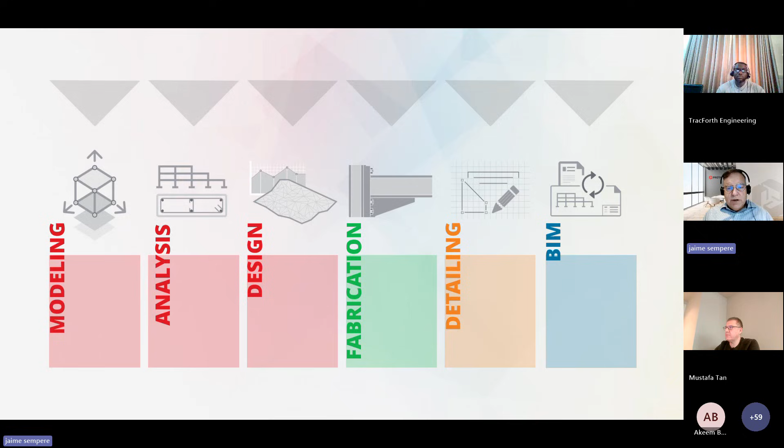Why do we consider ourselves different? We feel that by integrating modeling, analysis, design, detailing, fabrication, and the BIM process seamlessly, it allows you to integrate the whole process in one delivery, one solution. This way it allows users to rapidly deliver a project, which is what we need to do at the end of the day.

ProtaStructure Suite consists of 4 modules, all within ProtaStructure Suite. So you're just installing one package and it's all in there. We have ProtaStructure, the core system for modeling, analysis, and design of your structure.

It's complemented with other tools like ProtaDetails, a complete CAD system for automated detailing drawings, focused on concrete detailing, including a library of unique designs. Then we have ProtaSteel, which complements the steel design by automating all the steelwork connection design and providing comprehensive steel detailing and automated connections.

For more than 40 years we've been growing, and so far we're already in over 10 languages. In Africa you have obviously English, but also French speakers and some Portuguese, and we have the solutions for you as well. We have many design codes, including the most used and sought after in this market.

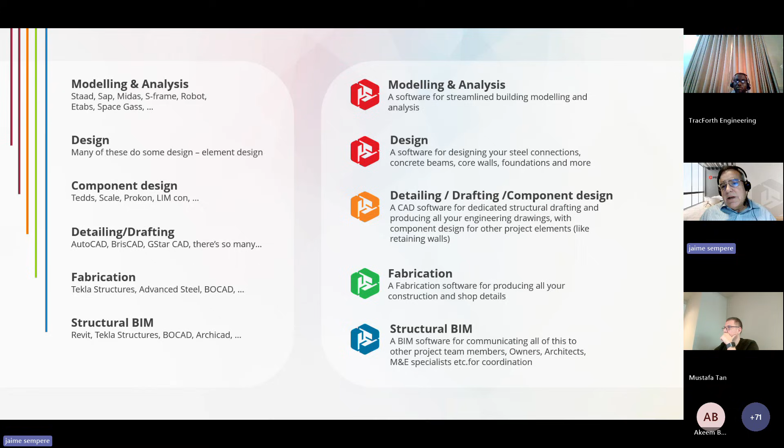That's why we pride ourselves in creating a program that covers all of the different parameters: modeling, analysis, and design with ProtaStructure; detailing, drafting, and component design with ProtaDetails; fabrication of steel features with ProtaSteel; and the sharing of data with ProtaBIM. Everything is under one software, one umbrella. You're not going from one software to another.

ProtaStructure Suite has always been developed with BIM in mind, and here on the slide you can see the entire BIM workflow that our software solution provides. Remember, all of these are offered in a single economical suite called ProtaStructure Enterprise.

As I mentioned earlier, ProtaStructure was used in modeling and designing the biggest passenger terminal airport building, located in Istanbul, covering over 1.5 million square meters. General Manager Mr. Imut made a statement from Prota Engineering attributing the added success of ProtaStructure's ability to perform project variations quickly, economically, and accurately.

We can also do projects like the largest university campus in Istanbul. This was also delivered with ProtaStructure — 50 buildings in a campus project covering over 1 million square feet.

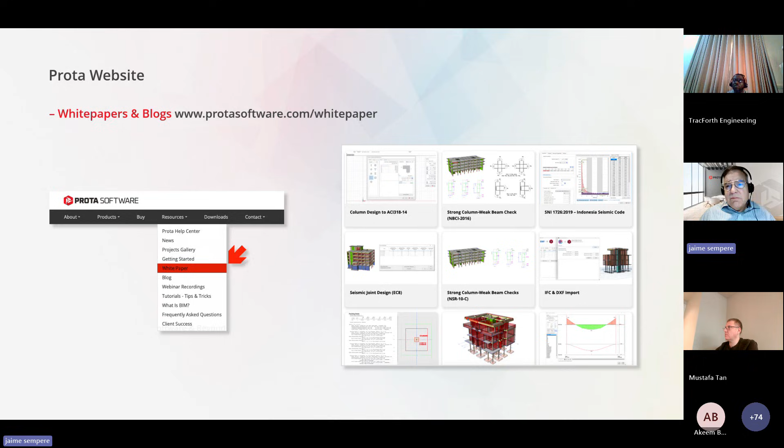We have what we offer to clients that become customers. Our licensed customers have access to our help center platform for one entire year to assist you in onboarding and all assistance that you need when you start with a new software, in addition to a white paper and blogs we offer for additional technical support, and of course a great platform for you to view videos and even entire training data on our software.

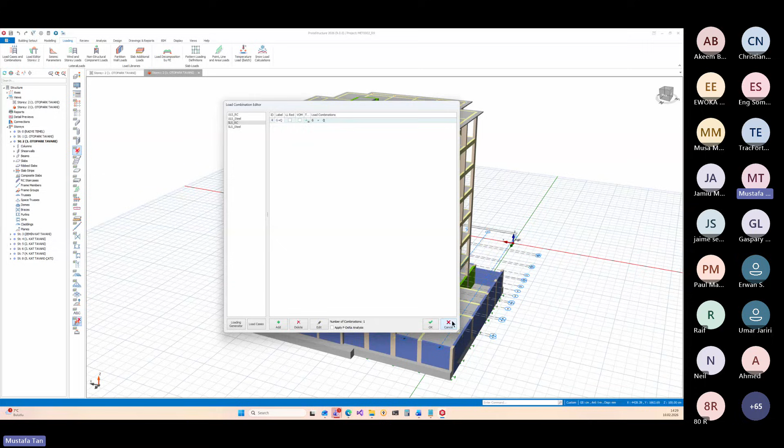So far so good, these are the combinations. But of course in the building setup you also have materials. All the materials here are brought by the templates, and they are specific to the code that you have selected.

Also, for Eurocodes you can specify the time-dependent properties of the material. We will use this in the long-term deflection check according to Eurocodes. You define the creep and shrinkage strain diagrams here, and in fact they are automatically calculated using the CEB-FIP Model Code 90 or Eurocode.

We have a huge list of settings, and we've collected them in a central user interface. So you can search, for example, rebar, and get all the rebar-related settings, or you can type in column and get all the column-related settings.

Mostly you will spend time in the design settings, steel settings, or column, shear wall and beam settings. All the design settings and detailing settings are residing here. In fact, one important setting here is the units.

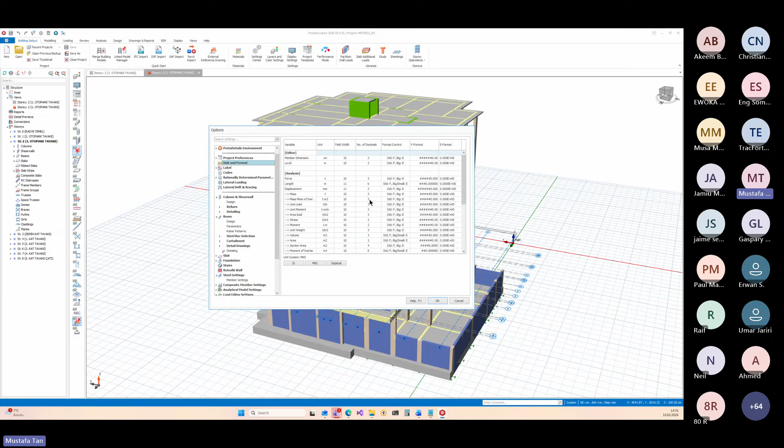These units are set by the template, but you can change them if you like. You can change the reporting and the UI units separately. This is not something you'll play with very much, but you have the flexibility to use Imperial, SI, or MKS units in the software. Anyway, so this is the settings.

Maybe we can continue with the modeling. Let me open up a project for you where we have concrete and steel models together, members together. As we say, ProtaStructure is a multi-material software, meaning you can model steel and concrete members together. So beams and columns here are modeled, and together with them you have the steel members.

All you have to do is select the appropriate member from here and model it in the structure. But one important thing in steel structures is that we have to be careful about the production during modeling, since concrete is a monolithic construction so we don't have to be as careful. Of course architectural eccentricities are important because when we do the detailing in concrete, the eccentricities should be accurate so that all the bar bendings and dimensions are accurate. That's also important, but in steel we have to be more careful because eccentricities should be compatible with the construction.

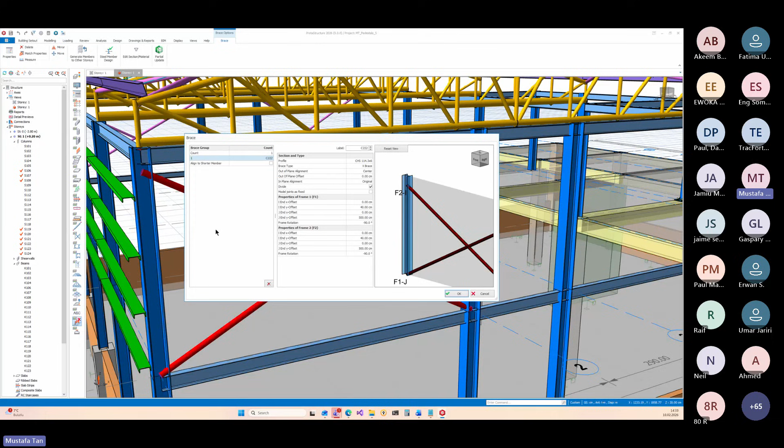In steel modeling we always separate the analysis model from the physical model, because in engineering we want simplicity in analytical modeling and some flexibility in the physical model. While we insert the steel connections, we always want to shift the members by 10 or 20 centimeters, and we don't want the analytical model necessarily affected by it.

So we can define all sorts of eccentricities here. Also, we have a purlin, which is again a macro member - all you have to do is select the trusses and you will have the purlins inserted. And together with the purlins, we have the sag rods.

These sag rods are not only for the visual, but they affect the design of the purlin as well, because they restrain the purlin against lateral torsional buckling, and they are also included in the analysis. You can, of course, exclude them from the model and from the analysis as well.

And for the trusses again, trusses are parametric in ProtaStructure. We have a library that you can use. Of course, what we do is always try to match the centroidal lines of the truss members in order to make the connection perfect during production.

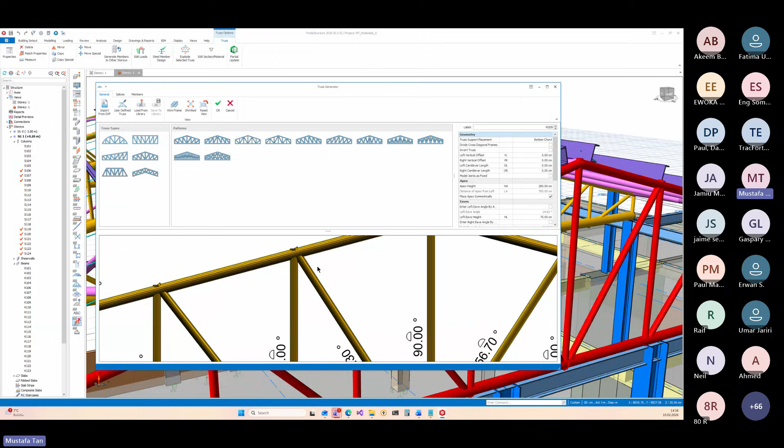We also have a concept called user-defined truss. If you have a custom truss beyond the templates, or from your DXF file, you can import that into ProtaStructure and use your own truss. These trusses are fully flexible - you can select the top chord and bottom chord sections, all the diagonal sections. They are more controllable, and you can customize them the way you like. So this is for the steel modeling.

Actually, it's a very flexible way of doing the model in ProtaStructure. So you can mix and match the structural members together. The recent addition to ProtaStructure was, in fact, the pedestals and the sub-basement walls.

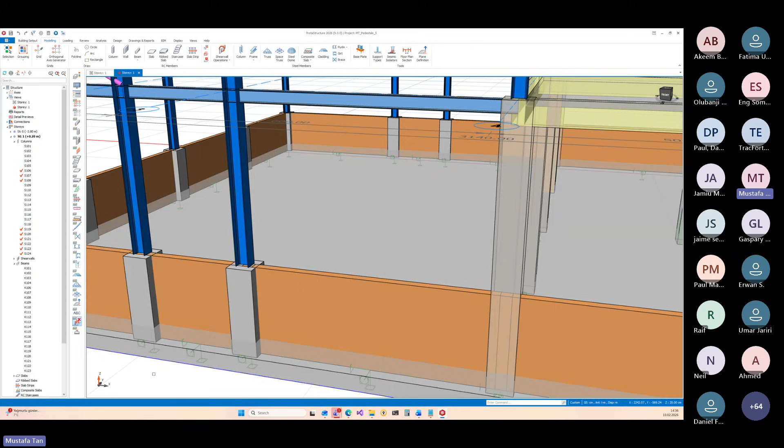Maybe I will explain it more specifically. In steel structures, let's see the concrete. For concrete, we can bury the concrete column within the foundation depth, because we can do so. But for the steel structure, for the steel column, we cannot bury the steel column within the foundation because soil will deteriorate the steel column and affect it negatively. So all we have to do is insert a pedestal under the steel column so that the pedestal itself is in the foundation and the steel column is sitting on top of it.

So this is what we brought. And sub-basement walls are also a part of foundation. In previous versions, we had to model them with ordinary shear walls, and sometimes we had to create a separate story for the sub-basement walls. But now they are directly modeled in the foundation level. So this is the foundation level from the plan view, and we have a dedicated sub-basement wall member. You can use this member to model the sub-basement walls, and they are included in the analysis, if you like.

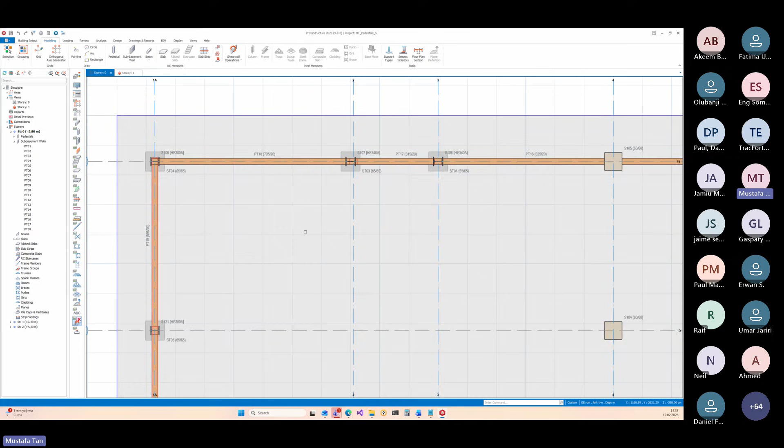You can apply loads on sub-basement walls. They can support other members, they can support lateral load, they can support the infill walls on top of them. Let's see if you have an infill wall - for example, you can go to the foundation level, edit loads, and insert a wall load on top of the sub-basement walls. So these are very handy members that close the gap at the transition from foundation to superstructure. We have introduced these members. Anyway, so far so good.

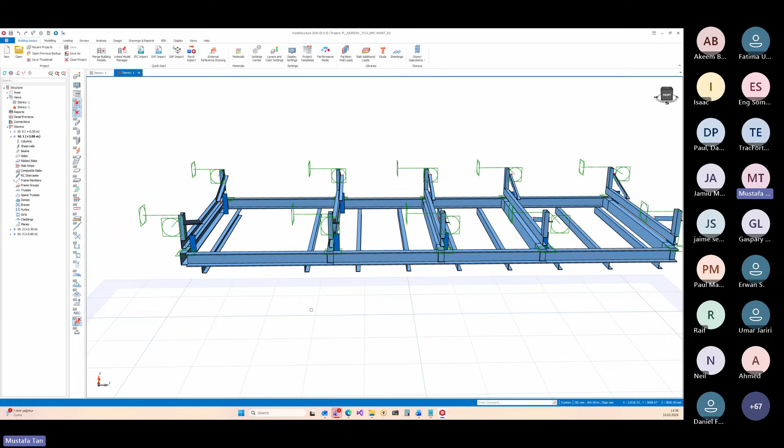Let's continue with another interesting project, let's see, it's called PL. Yes. And this is a very interesting structure. In fact, as you see, this is not a building - this is an overhang structure. It looks ugly, but our users are able to design structures like this. You can use ProtaStructure as a general purpose analysis package. There's nothing stopping you because you don't have to have any columns or shear walls or beams in the system. Well, you can design a structure like this using the frame members.

Let's see, for example, this member here - we have supports. You can assign supports to any members in ProtaStructure. So by assigning supports to these members, our user modeled and designed an overhang steel construction structure like this. And using the loading editor, you can load the structure any way you like, or you can select a single member and edit load - you can assign loads on the member. It can be a trapezoidal load, a partial load, or a point load.

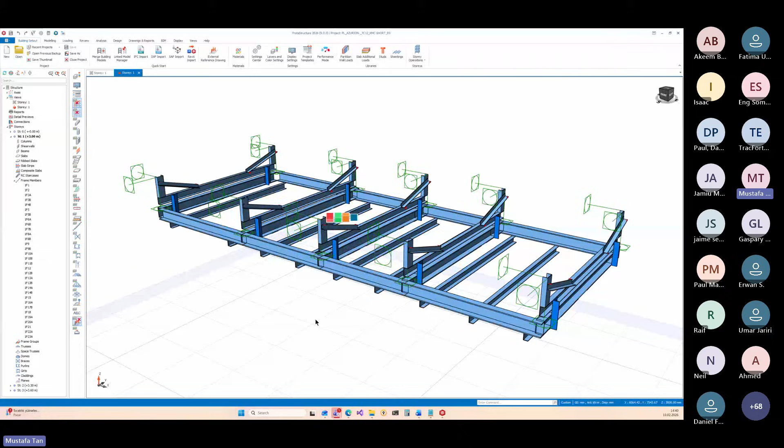It's very flexible. So now with the additions that we did with the program, in fact maybe it's correct to say the sky is the limit in the software, because as you see, this is one of the structures that our users model. Our users model pedestrian bridges, all sorts of playgrounds, steel structures that are really having parametric shapes. So this is the way we are going at the moment - we are going beyond the conventional structures as well.

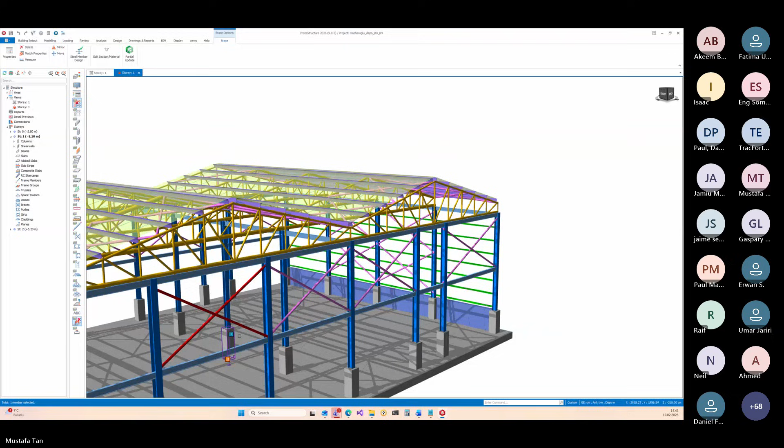And as you see, we have the brace members. The brace members are also parametric. You can define it with a brace macro here.

Another interesting thing, this building was modeled for demonstration purposes to show the castellated beam features. So now in ProtaStructure we have castellated beams. All you have to do is go to the properties, and in the castellated beam property you can select hexagonal openings, circular openings, and it will be a cellular beam, etc. You can control the parameters here. The design of the castellated beam also uses the proper checks.

Let's see, we have the analysis here. Let's go to the design of this steel member design. Okay, let's check the design and detailed reports.

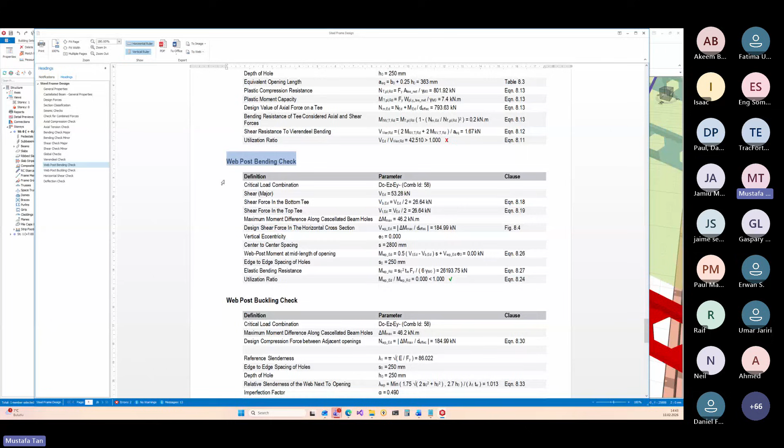The castellated beams are different than ordinary beams because you have to do a web post bending check, since between the two openings you have a small portion that's susceptible to bending and buckling. So you have to check web post buckling and web post bending, and that small portion between the openings is also susceptible to shear, so you have to check the horizontal shear as well. So in addition to the standard checks, you have these additional checks here.

Let's close this one. Let me show you another - this is again from one of our users. It's a steel building, but a larger one, a larger complex than the ones I showed you.

What is different here is - let's change the view to rendered. So this is again steel columns, steel rafters, and trusses as well. We have here the brace members with the brace macros.

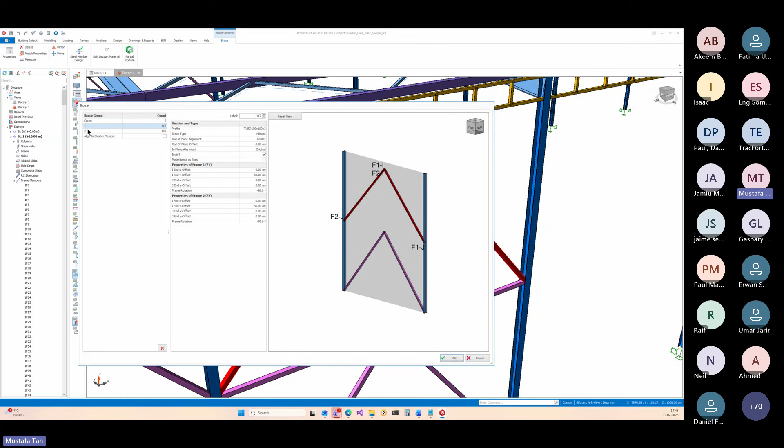But here, as you see, in between these two columns, we have two braces defined as a brace group. So when you have to model multiple braces, you can do it with the brace group functionality. And in between these two braces, our user modeled a vertical brace with a frame member. So you can mix and match macro members and normal frame members in the model - this is a normal frame member, and its frame type is vertical brace. You can do this very easily.

It's fun to do in ProtaStructure, in fact, but here's one interesting modeling approach. This is also a horizontal brace, but here you see we have a dashed line representation of the analysis model - the physical model is slightly above the analytical model.

That means this frame - let's open the linear view - is in fact connecting to the purlin, connecting to the beam and the column at the analytical model level. But when you switch to the rendered view, you will see that the physical member is slightly above the analysis model. That's because we have to coincide the physical members to do a proper connection.

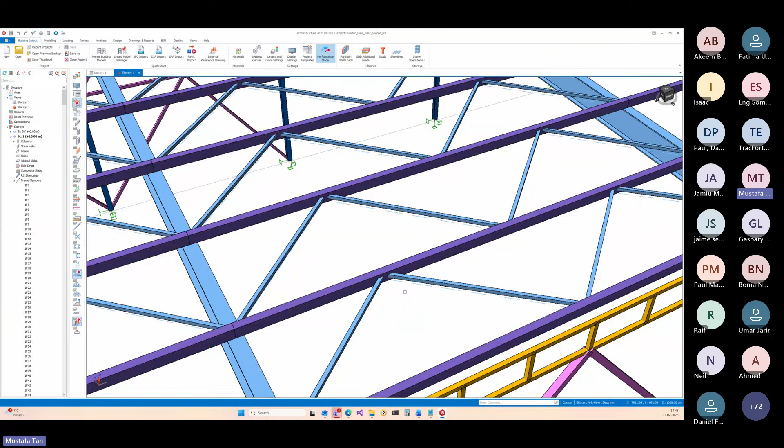And we don't want the analysis model to be a dirty model full of rigid links, full of small eccentricities, etc. Of course, in the analysis models, eccentricities are necessary when they are significant and when they affect the design. But for these kinds of cases, eccentricities are usually within the limits, and you can just simplify the analysis model.

Okay, let's check the properties of this frame, for example. And when you go to the 3D view, you will see that I have an in-plane offset of 10.5 centimeters.

Let's go to the other model. We have a very recent addition in ProtaStructure 2026, which is the stairs. In fact, we had the stairs before - in previous versions, we had the stair design functionality in ProtaDetails, where we were able to design the stairs, but with the new ProtaStructure you are able to model them inside the building. So let's check the 3D view.

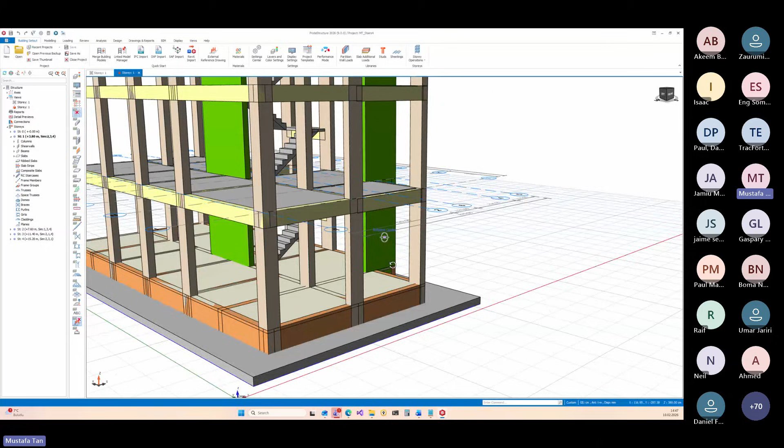As you see, first of all, in the foundation we have the sub-basement walls, sub-basement slabs. Of course, the sub-basement walls are supporting the infill around. They are not like basement walls - they are different than the basement walls. In the structure, we don't have a basement. If you have basements, you don't need the sub-basement walls.

Sub-basement walls are usually for structures that don't have basement walls, because some structures are already 1 or 2 stories below the ground, so you don't need a sub-basement member to do the transition. If your structure doesn't have a 1 or 2 story basement, if it sits directly on the ground, you have to bury the foundation by some amount, like 1 or 1.5 meters, and you have to do the transition with the sub-basement wall.

That 1.5 meter infill will be supported by the sub-basement walls. Let's hide this - hide selected. Also, inside this one, you will have the infill as well.

Sorry, yes, it's soil fill as well. On top of that soil fill, you will just lay some fabric mesh reinforcement, and that's all. Then you will have the sub-basement slab. So this sandwich here is part of the foundation.

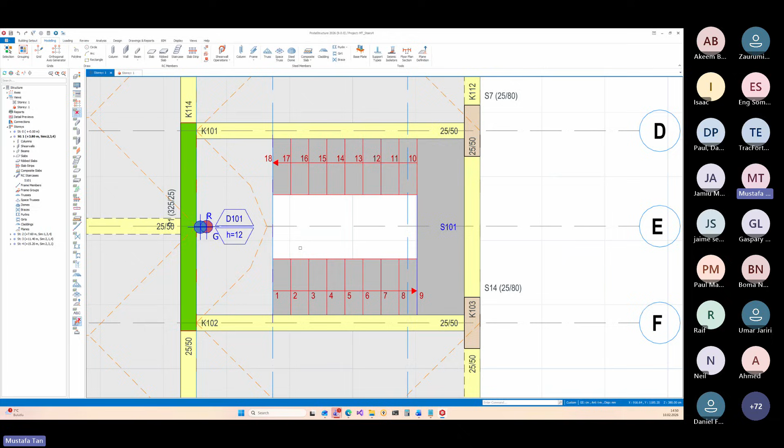Okay, let's see what we have here. We have the staircase. All you have to do is show the region - I won't do the demonstration, it's very easy. Select the staircase, insert using 2 diagonals, show the place that you want to insert the stair, and we have a dedicated stair editor here.

So you select the type. It can be straight, straight with a single landing, an L shape, or U shape, or U shape with 2 landings. We will increase the types here - of course we are currently working on spiral or helical staircase. But this is parametric. You can specify the landing width or the flight width, number of treads - all customizable, and you can even see the rebars in 3D here.

And all the detailed drawings are created using this rebar. The best part is, when you do it, it will be generated to all the similar stories. Let's check one of the stairs here - all the self weights and other loads are automatically applied.

But if you want to apply additional loads to the staircase, you can - this is like any other regular member, so it's very easy. Let me directly jump to the analysis model. The best part here is you can model the stairs with the building.

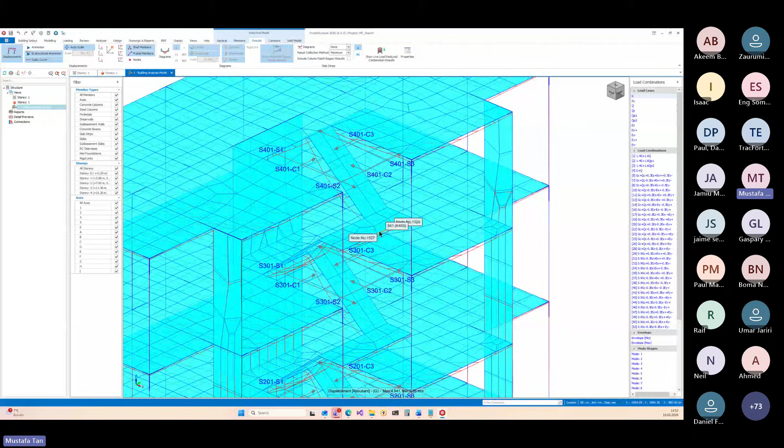This is the magic here, because first of all, you have to mesh the slab with the staircase, otherwise it will not be a nice model. We recommend you to mesh the slab with the staircase. But I must admit that modeling staircases with the building is a controversial topic - engineers are discussing whether we should include the stairs in the model or not. In fact, the stairs are the members that will maybe be damaged first in the earthquake.

So by modeling them with the building, what we do is introduce a stiffness between these 2 stories. Let's close the displacements - as you see here, these staircases will act as a brace member between two stories. They will try to limit the relative drift or lateral drift of the structure. Maybe it's best to exclude them from the building and see how the drift changes, or you can do another model and include the stairs.

So modeling stairs together with the building model may do more harm than good - you must be careful to do that. Everything integrated is not always a good thing, but this was our user request. The best part here is you can design the staircase with the finite element.

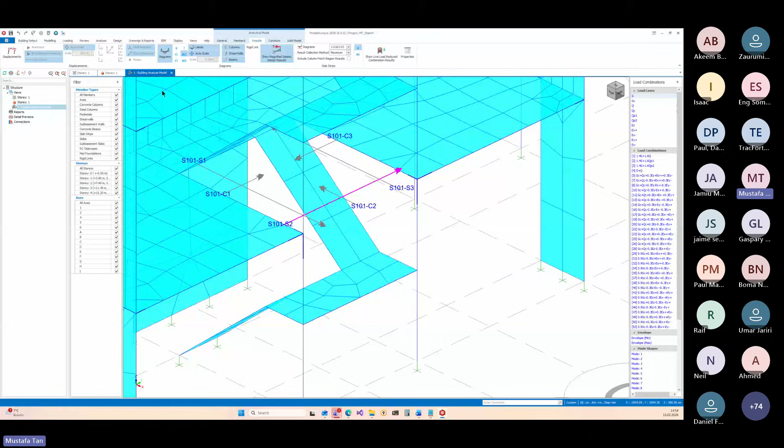So here you see we have - let's see the moment diagrams. We have the slab strips, and we collect the moment values along the slab strips. And when we go to design, let's go to the staircase design - you will see the staircases in the model.

Oops, I recently changed the model - I think I made a mistake here. Okay, let's start over again. Sorry for this one.

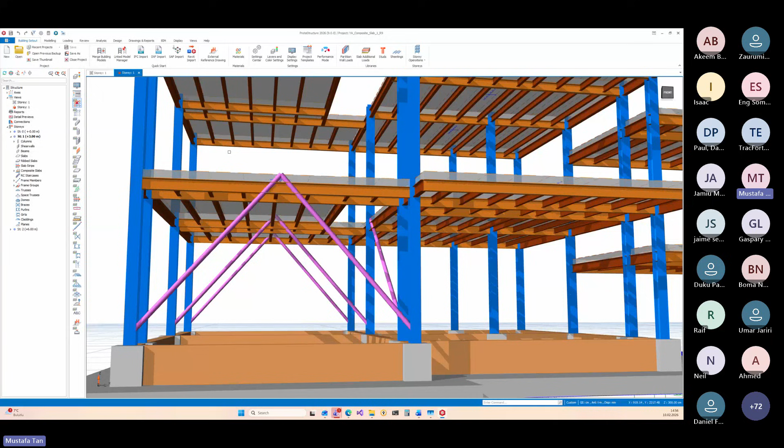And we are not done yet, because in addition to the stair functionality and steel and concrete functionality, we also have a very strong functionality we call the composite slabs. In ProtaStructure, you can model and design composite slabs as well - by composite slabs, I mean composite beams. So here in ProtaStructure, we have a frame type called secondary composite beam, primary composite beam. It's also here in frame: primary composite, secondary composite, and also you can insert a composite slab on top of these members.

And of course the composite slab has a deck direction, so you have to insert the deck. The deck direction must be perpendicular to the secondary member. So let's see the properties - we have the deck, and all the effective widths between the decks will be calculated automatically, because composite design is all about effective widths, and it's all about the composite degree of action.

So what I mean here is if you go to the setting and the composite member setting, what we usually start with is analysis: composite degree, and composite degree tolerance, because you have to assume that your members will behave at some composite degree. You cannot assume full composite action because there will always be some shear slips, there will always be some imperfections. So the interaction between the steel and the concrete will not be perfect - there will always be a partial composite behavior. So we assume at the beginning the default value for the composite degree is 50%, but of course by changing that you can change it.

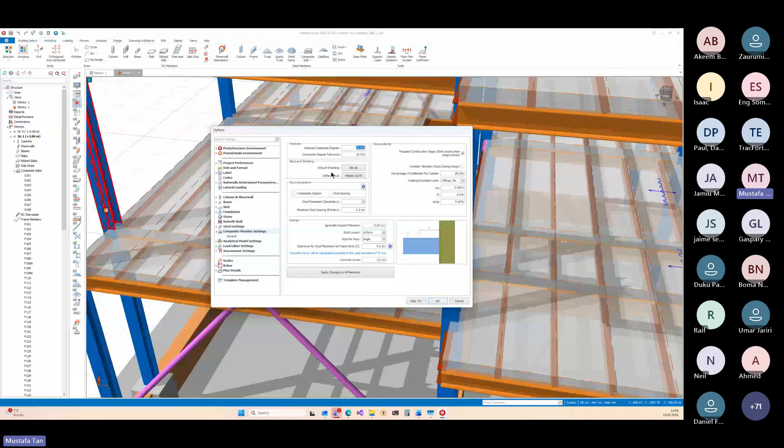When you do the analysis, we assume and calculate this effective width using a composite degree, assumed at the beginning. And at the end of the analysis, let's see the analysis model first.

And also maybe another model for the floor models. Analysis of the composite building is not straightforward because in composite structures, we have stage construction. This is different from stage construction in high rises. During construction, you install the deck but don't pour the concrete first - that's one case. The other case is you have the concrete, but it hasn't set yet. It's wet concrete, and it's nothing but a load to the system. Also during construction, you have a live load, but it's a construction live load.

Let's go to story one and go to properties. That's where we set the live load during construction - the live loads caused by the workers, etc. You enter that value, and while ProtaStructure does the analysis, it will do a floor by floor analysis.

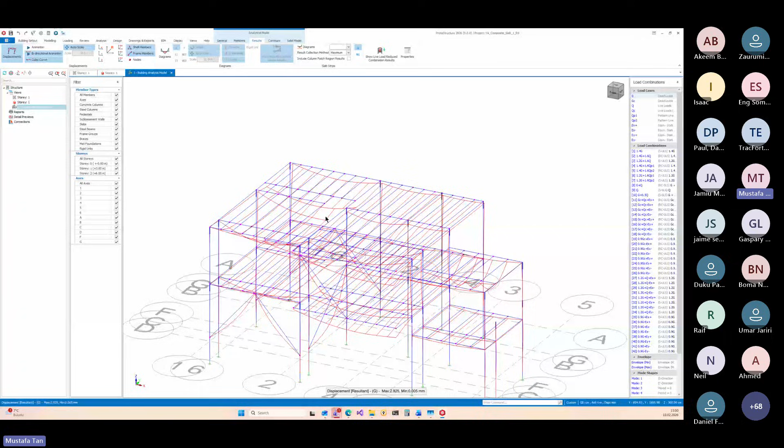After the concrete sets out, after the construction finishes, we now have solid concrete, and we don't have hinge connections anymore - we have the final loads on the member. We have the final results for the structure. So we combine these results and we get the design values.

Finally, you go to the design and the composite beams menu. For example, you have all the composite members here. Double click one of them and you will see that shear studs are calculated. So the design is also done according to the 50% composite action.

But sometimes you will have difficulty in design because it's not straightforward. You can change the stud spacing, or you can change the composite degree. If you increase the composite degree, say to 60% composite, you will have to increase the number of studs, because to satisfy more composite behavior, you need more studs.

You can decrease the composite action, make it 40%. That means you don't trust the composite action as much - you say you'll live with less composite action, so you decrease it here. But if there's a tolerance of 10% between analysis and design composite action, you have to be careful about this. It's a bit detailed, but anyway...

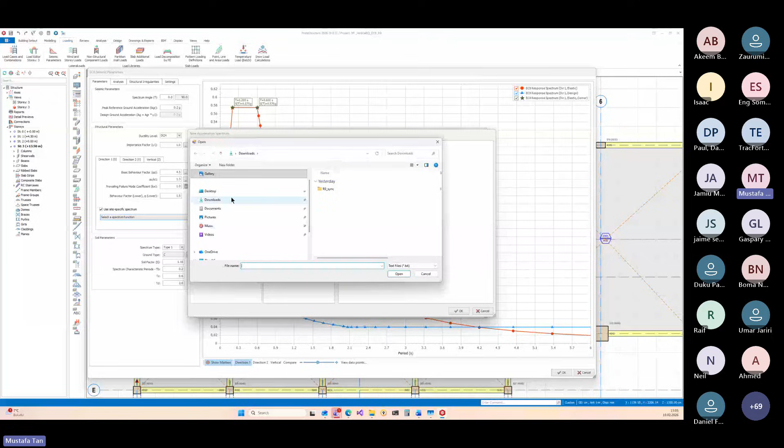Then you will import from file - if you have a spectrum in a notepad or Excel file, you can import that spectrum here, and you can use the site-specific spectrum in X and Y direction, and also in Z direction.

Let's see. Maybe before vertical earthquake, I can mention this.

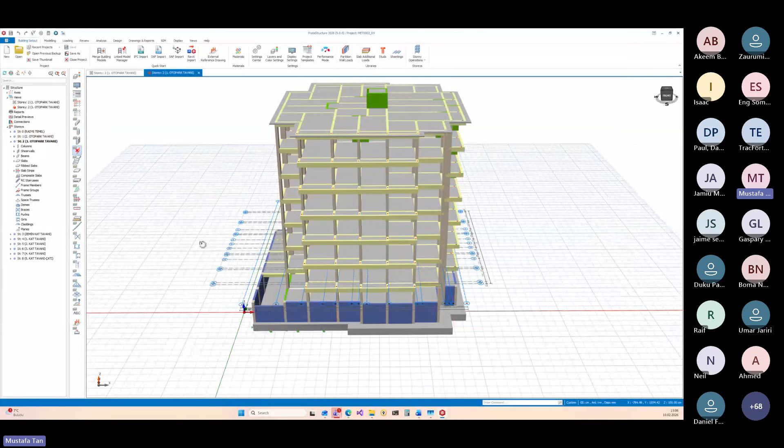This is a model from a user. It has a basement story, and a podium-like structure in the basement. It's a 7-story building, and we have an equipment story here as well.

So when you go to edit story, you can set parameters here, like whether one story is a sub-basement or a basement story, or you can select imposed load reduction, because if you have a high rise, you will want to apply imposed load reduction. Also for the earthquake, you can set the simultaneous presence for the imposed loads.

When we do the analysis, besides the seismic parameters, we have other things like model options. You can use the crack section properties—this is required by most codes. Most of the time you are not allowed to use gross section properties; you have to use certain crack section properties, and you can control these here for the members.

Like shell shear walls, mid pier shear walls, basement walls, slabs, columns, and beams. Depending on the member type, you can set different effective section modifiers for different degrees of freedom—for bending, axial, or shear, etc.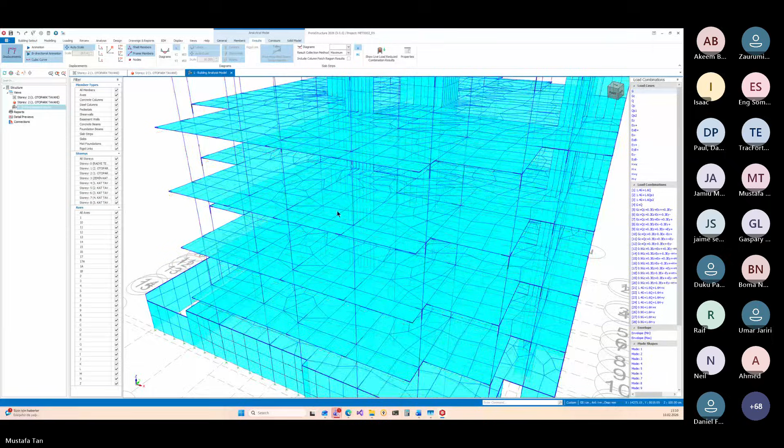Let's close the results for a brief moment. As you see, we are using quad mesh in the slabs. This is also new in ProtaStructure 2026—before, we were only using triangles, but now you are able to use quad mesh as well, and we are doing a compatible mesh. So where are my notes here?

Okay, so these are all compatible with the walls and the foundation as well. So let's check the results.

Displacements here—so what we have here are the earthquake loads. We have the EX load case, so you can check the displacement of the structure in each earthquake load case.

But here we have an interesting case, because since we have a basement, ProtaStructure performed a two-stage analysis. And for the basements, you have the basement load case, and we have also some soil effects here.

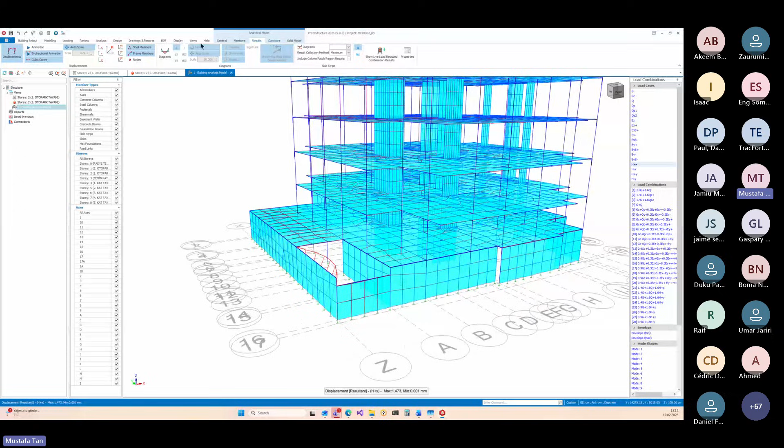Our user applied a soil load on this shear wall. You can see the pressure here—the shell pressures. Here we have applied the HX load case. We have load here, as you see, in the analytical model. Let's get rid of this one.

So this is the place where you interrogate the analysis model, and you can always check the modes. Let's see what we have. In fact, this is not a desirable mode, because the first mode is torsional here—we don't want the first mode to be a torsional mode.

In most seismic codes, this is either prohibited or penalized. You cannot do this; you have to revise your structural system to get a better behavior.

So the translational modes are most probably the second or third mode. Let's animate the second mode. Even the translational modes here are coupled, because as you see, it's not a pure translational mode. It is translating and rotating. So these are not ideal as well. We have to be careful about this vibrational behavior of the structure and revise the structural system accordingly.

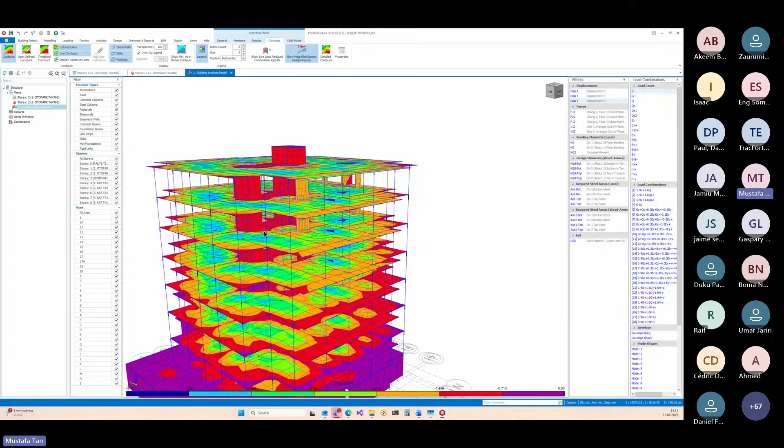Finally, maybe we can see some contours, maybe the displacement contours in the G-load case. You can always see the results here. All right, let's move on.

Let's go back to the other model. We have here a vertical earthquake model. As you see, this is a special structure. In fact, this is somewhat imaginary because it has a large span beam here, and also large cantilevers, a very large span slab. We also have openings, a waffle slab, stairs, etc. We have inclined columns, sloping columns, slanting columns, and a column sitting on a beam. So these special structures obviously require a vertical earthquake analysis with modal response spectrum.

So let's directly see the analysis result. Let's change the view. First of all, let's see what we have in EZ vibration. You see we have members and slabs vibrating in the Z direction, because in this case we have activated the Z masses in the system. Let's stop the animation.

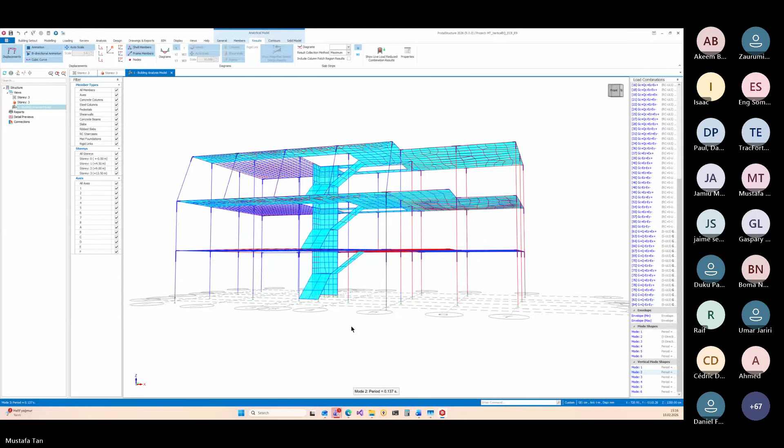In the vertical mode shape, the first mode is dominated by the slab here, the second mode is dominated by these two stories, and the third mode is like this. You see the structure has different mode shapes for different mass accumulations. But the EZ load case is the combination, the modal combination of all the modes here. So we have such a combined behavior.

We have diagrams—let's close the labels here. These diagrams will be either positive or negative, depending on the mode shape and the combination. That's why we always include the vertical load case, positive or negative, in the combinations.

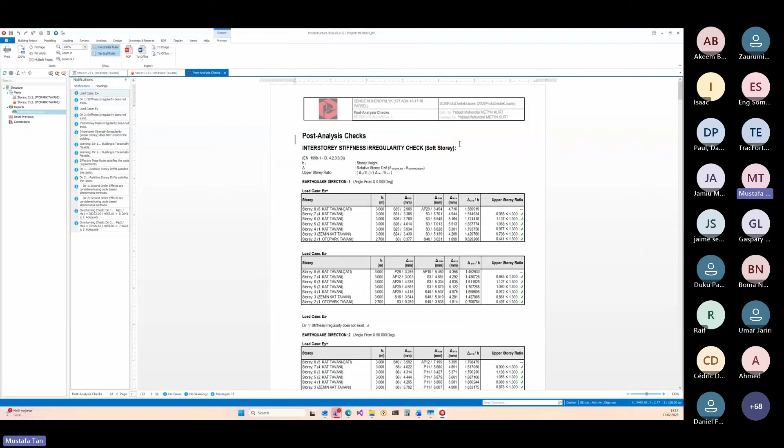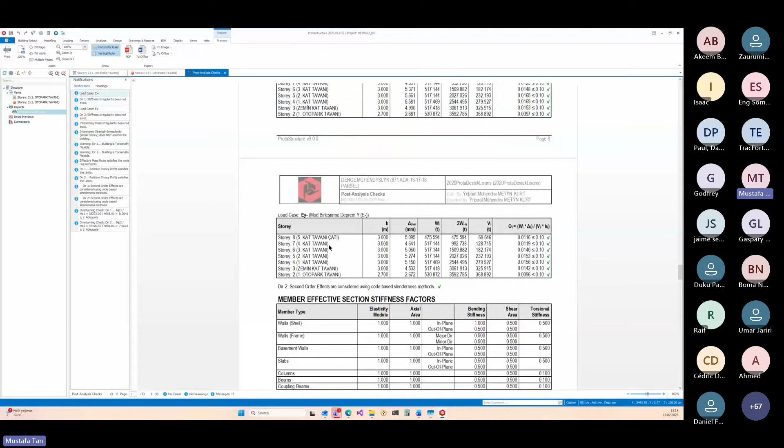Before finalizing the analysis part of my presentation, let's get back to the previous model, because what's important here is the post-analysis checks report. We collect all the earthquake checks in this report: irregularities like soft story, mass irregularity, weak story, torsional flexibility, mass participation checks, wall frame checks—especially for Eurocode. This is important because if you have a dual system, a frame and shear wall interaction system, your frames and shear walls must be sharing the base shear in certain amounts. This is the table where we check it, along with relative drift check, second order requirement checks, etc. This is a very important report that we have here.

Okay, let's go to maybe... okay, this is our simple project. For the design, first of all, in the design ribbon, we have the concrete design part and the steel design part, in two separate categories.

For the columns, we have batch design capabilities, so you have all the columns listed in your structure and you can do a column design in batch mode. You can select the members from scratch, or you can check the steel, because in ProtaStructure you can have revisions. For example, you modeled the structure, designed the reinforcements, then all of a sudden you had to change a member dimension, or add additional components. You don't have to reselect the bars from scratch—you can come here and select the check steel options.

Check steel options will not touch the existing reinforcements. If you want to select new reinforcements, if the existing ones are insufficient, you can select the first option. If you don't want to select new ones, even if the existing reinforcement is insufficient, you can select the second option. Or if you want a clean slate, you can reselect all bars. This is the approach in ProtaStructure.

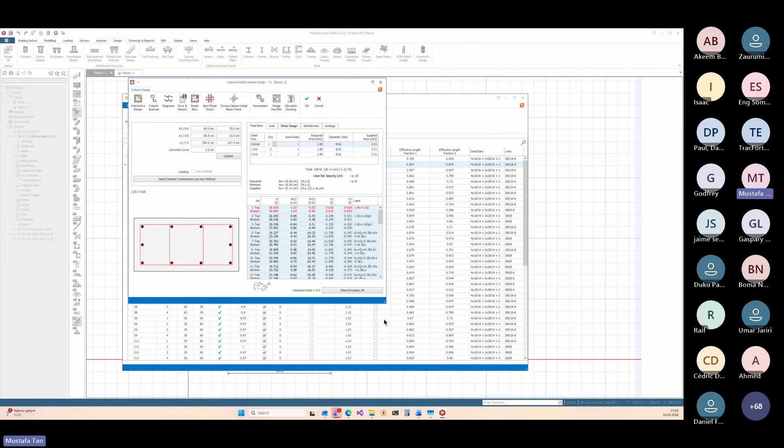If you double click on one of them, you will see the details. There are some important items here. First of all, this is a rectangular column, and we have shear design—links and link patterns here. This is also a global setting, but you can select a double link, triple link, or single link for the columns in order to satisfy the confinement. ProtaStructure will automatically put the links or tie bars between the longitudinal bars. You can see the interaction diagrams here, or interrogate the member diagrams for different combinations, and get a report here.

And while you are here, you can also check the strong column weak beam. If a seismic code is active, most of the time, strong column check is part of your design. You can also come here for this column and have a look at the connection that it connects with K210 and K211 beams.

For this connection, the strong column check is satisfied. You can also get the joint shear check for this column. This is also satisfied. Of course, for these checks, beams must be designed as well, because strong column and joint shear checks are post-design checks. You have to finish the reinforcement design, then you have to check this strong column and joint shear. These two checks are also available for all the joints in the structure.

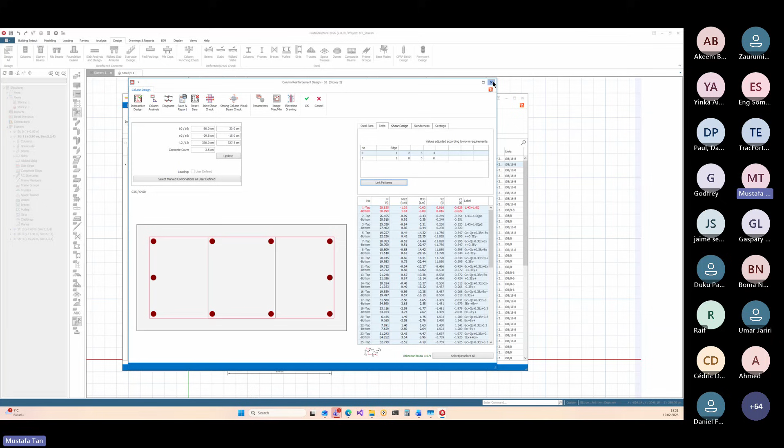For seismic code, of course this is not in all the codes, but for Eurocode and Turkish code especially, you have the tension shift, shear wall envelope, and you have the critical check so you have the end zones accordingly.

Anyway, so this is how we do the column design, and when we have the beam design, the logic is the same. You have the beam design in batch mode. You can still use the check steel options here. And in addition to the column, for the beams we have a grouping, so you can group the beam axis, not individual beams, but the beam axis. So if they are similar in geometry and section, you can make them a group and select a typical bar for these members. Anyway, let's double click.

Oh, this is the simplest one, sorry. Let's double click in one of them. In this model, I have a bent up pattern, but it doesn't matter. You can select a standard pattern as well without bent up. This pattern system is also very powerful in ProtaStructure.

This is all interactive. You can change the bars here, and as you change the bars, the design will adapt itself accordingly. Anyway, so this is the beam detail interface, but we have a detailed report here. Let's see what we have.

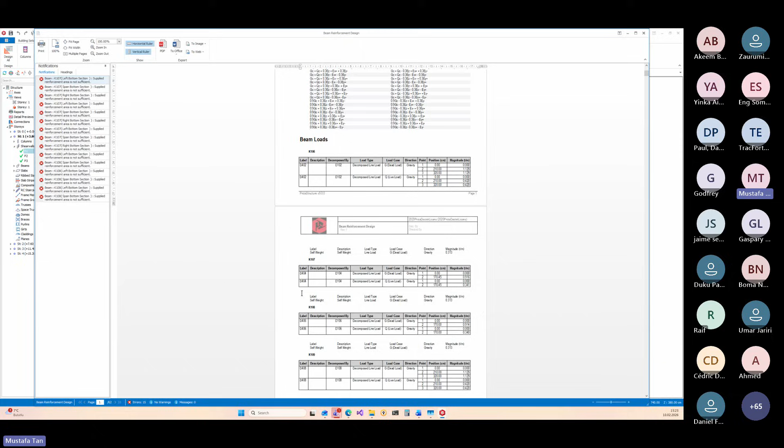In the previous years, we spent a lot of time and resources to introduce the detailed reports, the step-by-step reports, so you can have all the formulas, the calculation steps here. But not for all of the members. This detailed report for one beam axis here is 62 pages, so please do not attempt to get the detailed report for all of the members in the structure. It's not for project submission purposes.

If you want to spot check the beam, verify the results, you just select the one beam axis and get the detailed report for that one. Other than that, we have the summary report. This is the one for the project submission. As you see, it is 6 pages.

And we have the strong column checks here again. Anyway, this is pretty much the beam design, RC beam design functionality in ProtaStructure. And maybe we can briefly touch on the steel design.

Here I have a very simple steel structure, and all I have to do is go to the steel column design here, and all the columns will be listed. And if you double click in one of them, you will see all the checks here.

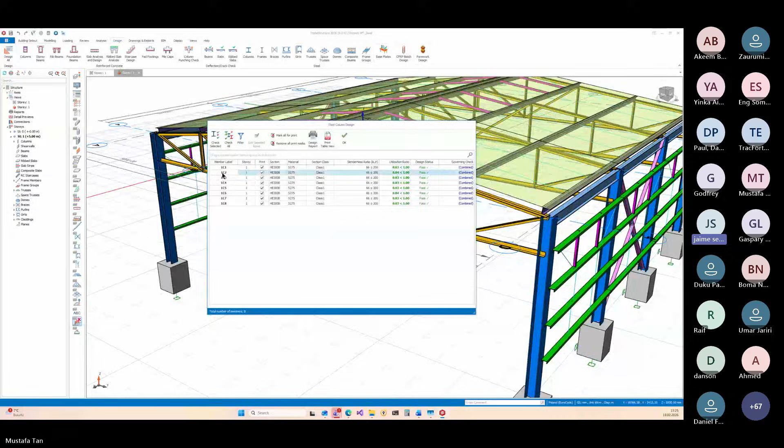And of course, you have the detailed report for the steel members. This is the steel column.

And we have other, let's say for the steel truss, we have the dedicated steel truss design. Let's see. Okay, this is a special UI because you see the truss itself with utilization ratios and all the sub-members in the truss. And then you double click in one of them, you can get the details as well.

So this is pretty much the steel design. I will not go into the details of it. You can always get the detailed reports or play along with the members to see how they react to different scenarios. Anyway, let's maybe we can briefly talk about the foundations.

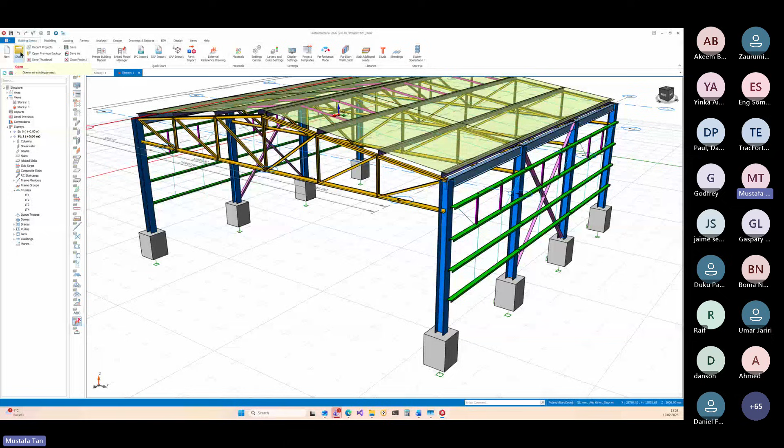I don't know how much time I have. Well, you can have another 15 minutes. Is fine. Okay, great. Let's talk about maybe foundations.

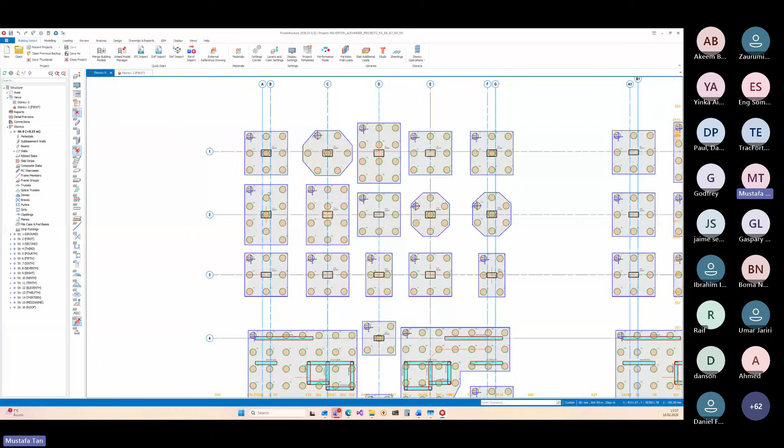Here they modeled a raft foundation, but it's not a single raft, it's a partial raft. They just did a combined pile cap or raft under a column with a slab member, and then modeled the piles on that slab. You don't have to use a pile cap, you can do this as well. It's very easy, all you have to do is model a slab and insert the piles. Here you see I have a column, two shear walls, and a core wall, sitting on a combined raft. So you can use finite element analysis to design this configuration.

And also for this pile, select the properties. You have to assign some capacity, and you have to assign pile spring coefficients, because in ProtaStructure we are not doing the pile-soil interaction. You have to represent the pile with a single linear spring coefficient. That's the challenge you have, but once you insert it, you can model this pile foundation as well.

Okay, let's look at another one.

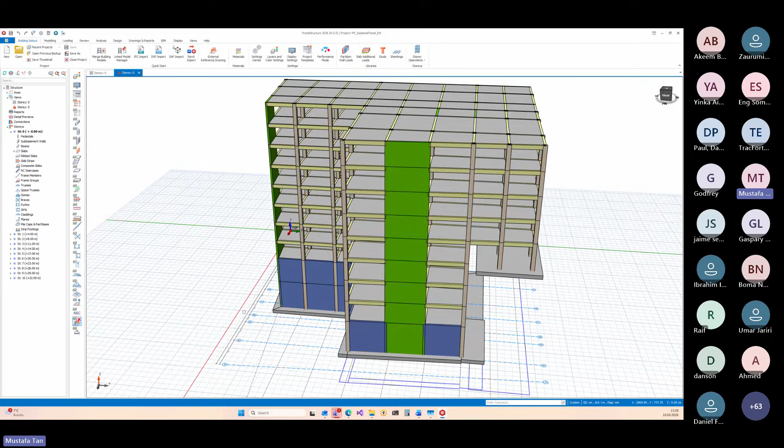This is again one of the powerful features in ProtaStructure. You see I have several basements here, and an elevator shaft going down the foundation, with one foundation level here, another one here, and another one here. This is an exaggerated model for demonstration purposes, but you can have different slab levels acting as foundation. These are all modeled at the foundation level when you look from the plan. When you go to the analysis model, you can see the entire building is modeled in an integrated manner with the foundation slabs. You can do a full soil structure interaction effect, building sitting on elastic foundation with the shells and soil springs defined in the model. This is one of the foundation types you can model in ProtaStructure.

And another one, let's see - I'm switching between projects, I hope you are not irritated by it. This is a factory building from one of our users, a very interesting building. But this time, let's go to the story, foundation story.

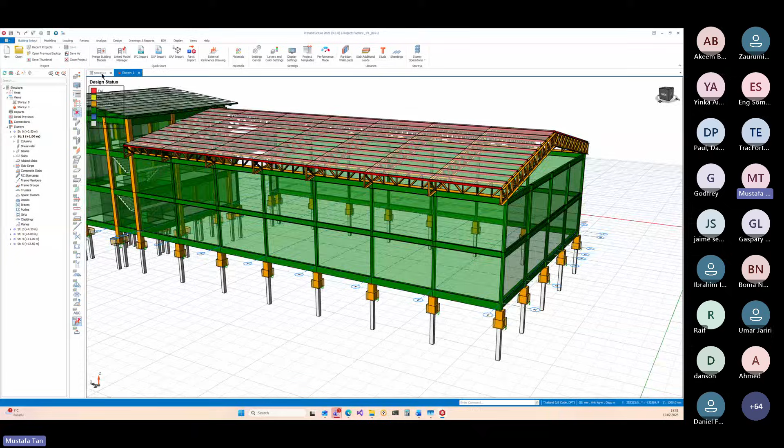We have pile caps, so let's go to properties. You can always design pile caps like this, but in this case we design the pile caps with a rigid pile cap assumption. We can design the piles and do all the deep beam checks, all the pile cap checks, and give you a report at the end.

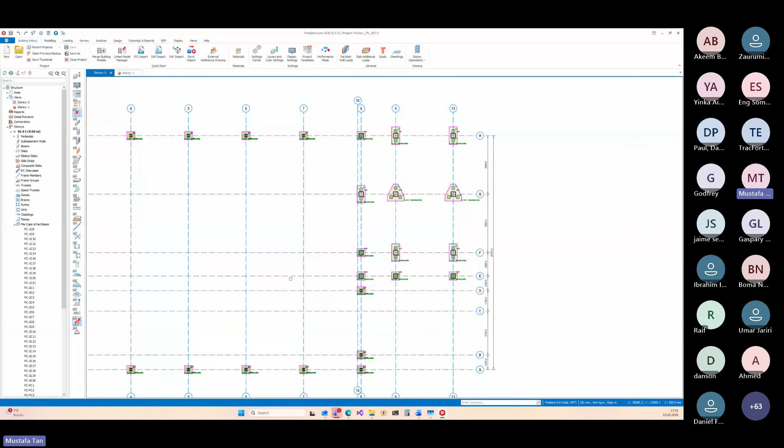Let's see what kind of a report we have. Other than that, we have, of course, the raft foundation as I mentioned. We have the pad footings, pile caps, strip footings, all in the scope of ProtaStructure.

Okie dokie, let's go to - maybe I can briefly talk about ProtaDetails since I have not much time left. I can be quicker maybe. So after you design the structure, of course you will prepare the detailed drawings. ProtaDetails is the software or product you can do it with.

Let's see, the design is complete. I have selected all the bars here. The ProtaDetails is opening at the moment. What I want to do is generate the details, I want all the details. With one click, you get all the detailed drawings, floor plans here as well, the column application plans, the quantity takeoff for the columns.

Column elevations, their section drawings, the column schedule drawings, beam detail drawings, beam rebar table, and beam elevation quantities, all are available. And of course, the staircase, the stairs that we modeled in the view, their detailed drawings is also here.

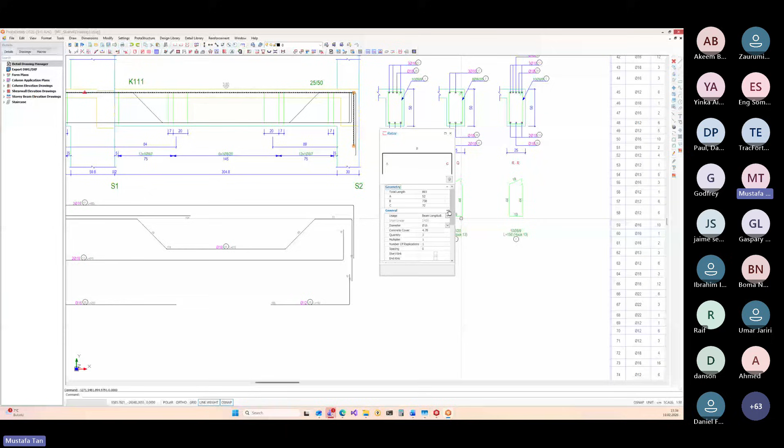But one important thing here is that these rebars are in fact intelligent rebars, they are not just lines and text. So when you click on one of the rebar, you will see that it has a certain property here. Let's see, this is number 17, the bar mark is 17. And where is 17 here? We have phi 16, 10, and length is 800 millimeters.

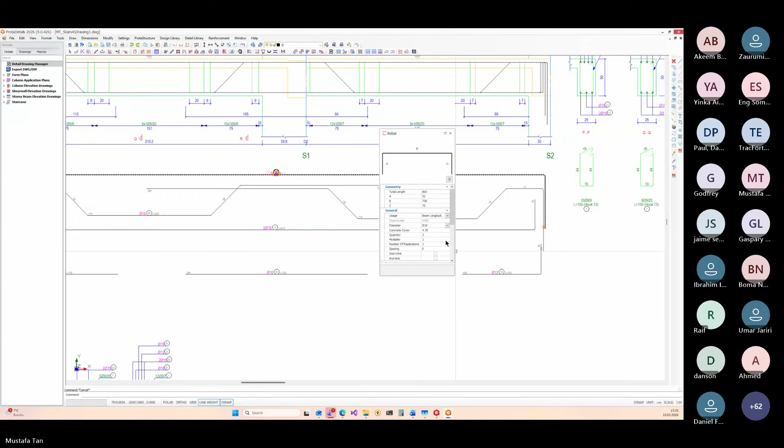Let's see, if I make it maybe - sorry, let me also check. Okay, where is that? I have 590 kilogram. Maybe I can make it 24, or not this one here, sorry.

Because the bars here, ProtaDetails is intelligent - the bar underneath the beam is just a view of the bar. This is the actual bar, and this is one of the views of the bar. The section is automatically updated, as you see here, this is dynamic. Let's see number 17 again - what's the bar mark? It's now 36 instead of 17. Where's 17? The number has changed. And let's see the total amount - the total amount is also changed.

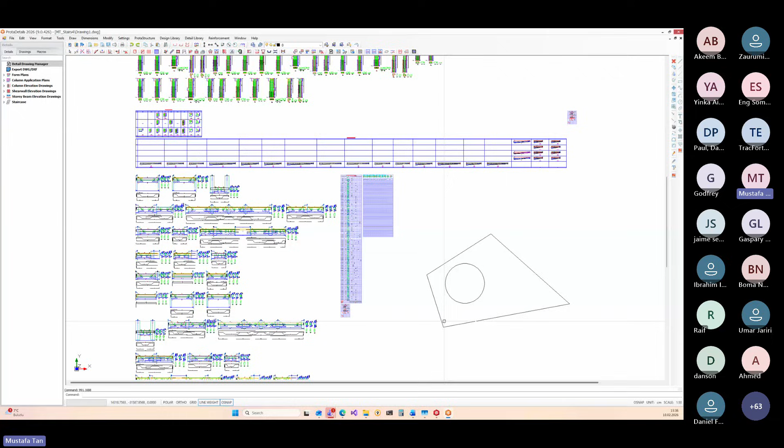ProtaDetails is not only a detailing tool, it's a CAD tool. In fact, what you can do here is insert lines, circles. You can use ProtaDetails as a CAD tool, it's like an AutoCAD LT. It supports the command line, it has layers, text styles, dimension styles, all of it. So you can use ProtaDetails as a standard CAD tool. On top of that, we have all the detailed drawings from ProtaStructure with a single click. You don't have to draw them all at the same time - you can select and draw only a single one, or use a sheet command.

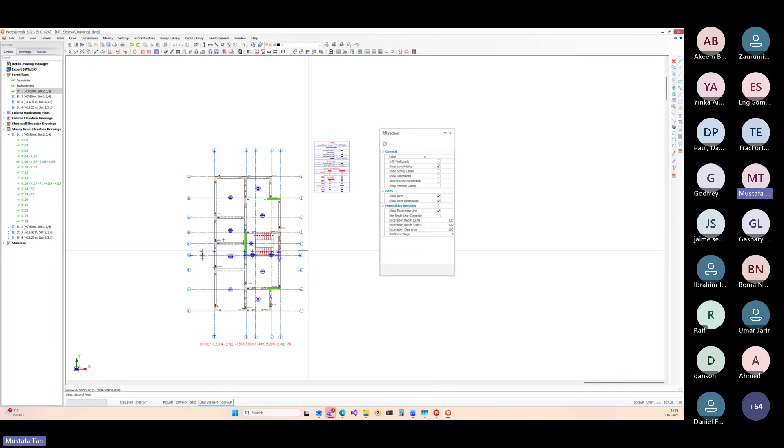This is a new functionality here. Let's switch to orthogonal. And you can get the building section in ProtaDetails 2026. Let's move this as well. You can move this.

And maybe here I have column elevation. In story one, I have two here, and maybe S4, not like this, but through stories. For all stories I have S2, it's not fitting. Of course, what you can do, you can always stretch the,

let's move this. As you see, I'm using it as a CAD tool. You can be very comfortable with it. You don't have to be nervous about it. It's just a CAD tool.

Stretch. Okay, and move it again here. Something like this, and through stories. Again, like this. Okay, maybe I can move it here. Of course, this is not maybe quite realistic position, but you get the idea.

You can just put anything in the sheet in ProtaDetails. And what I will do at the end, I will do one more stretch here. And what I will do in the detail library, I will put a shear wall elevation.

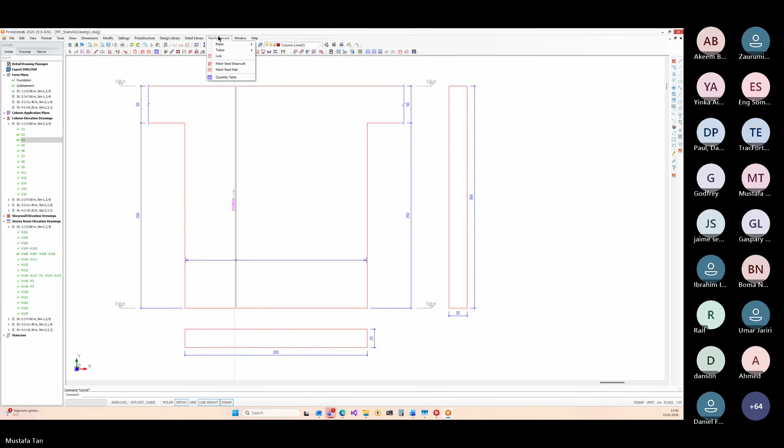Rebar, 4 points. Let's select the type. Again, this is the type. You can, by the way, always select the diameter, the multiplier, and the scale factor of the rebar.

The scale factor depends on the scale factor of your drawing. For example, if you are working on a 150 scale, and if you want to draw a 20 scale drawing on this number, you have to select the scale factor as 2.5. Anyway, just for the demonstration, maybe I can put something like this.

Now I have two reinforcements. I have a composite sheet here. All I want to do is quantity table and select all of them and put the bars here. So you can just quantify any drawing, any intelligent drawing you have.

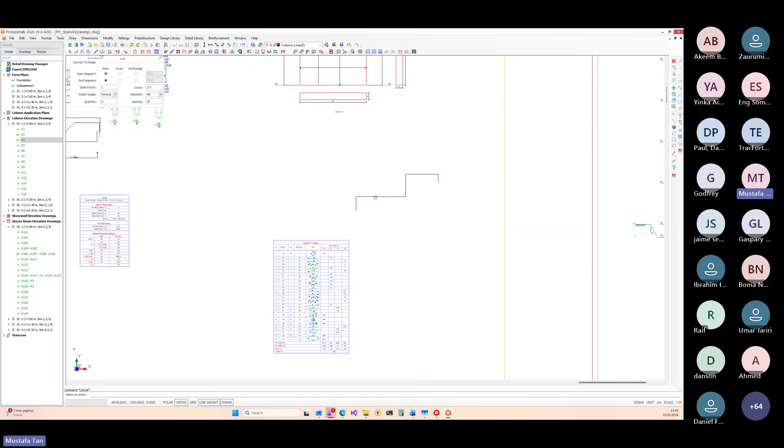You can even convert, let's say I have a line object here, something like this. A rebar like this, okay? What I want to do is rebar, convert the rebar, and this one. I converted this into a rebar.

Sorry, since I drew this line, I could use the polyline. It's better. Let's get rid of the orthogonal. Let's say I have this rebar here. So reinforcement, convert the rebar.

So start segments, you can always select the anchorage for the start and the end segments. And you can set the scale factor, let's say 2.5. And rebar usage can be a general rebar. Quantity, let's say 4. Diameter will be 12, spacing will be 25. And I will just click and convert.

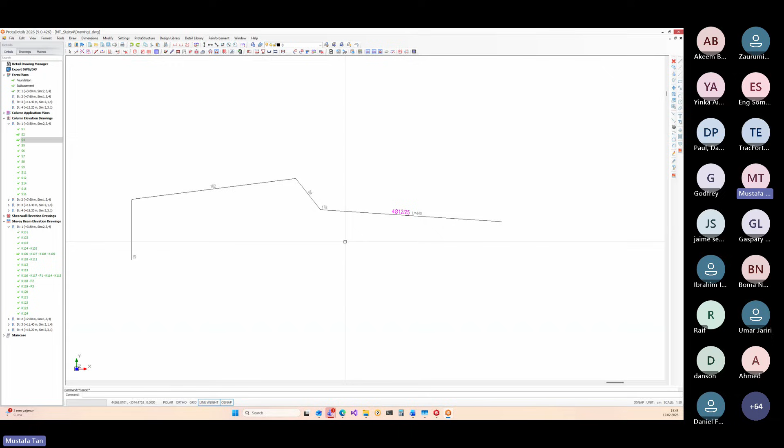So what this feature is handy for is if you have, let's say, an unintelligent DXF drawing. Let's say you received a formwork plan from one of your colleagues, and all the rebars are drawn with lines or polylines. What you can do, you can convert all the lines to the rebars here, as you see, and you can quantify it immediately to do a value engineering maybe, or to do a quantification.

And what I want to do, I want to do a quantity table again, and I want to select all of them. And it will say that the bars are already assigned some bar marks. And I say yes, I put the new one here. It deletes the previous one and puts the new one. Now I have this weird shape rebar as well here.

So this is the drafting capability of ProtaDetails in a nutshell. And the other, third powerful capability is the design library.

So on top of this, we have cantilever retaining wall, for example. It's capable of designing a retaining wall. You can define the backfill, front fill parameters. You can insert some parapet shelves, and you can design the reinforcements in the stem and in the base plates. You can do all the stability checks or total failure checks here, and it will create you reports, detailed reports.

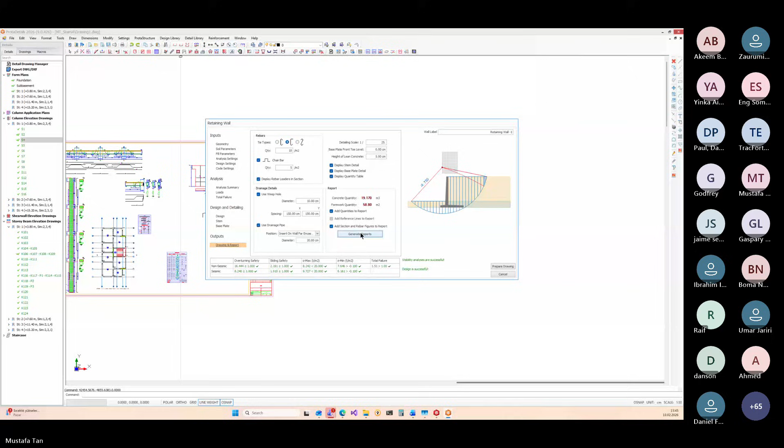And a drawing. So this is the drawing. Similarly, you can have a pile design functionality.

If you want to do a pile-soil interaction design, all you have to do is calculate the working load, calculate the lateral analysis, and insert the soil profile. We have some default values, design parameters, and SPT values.

And we have the working load diagrams here, showing how the capacity of the pile changes with respect to depth, along with the design parameters. You can also design the pile section.

And all of a sudden you have a moment diagram and results for the section: shear, deflection, soil pressure, traction diagram, pile section, PY curve, etc.

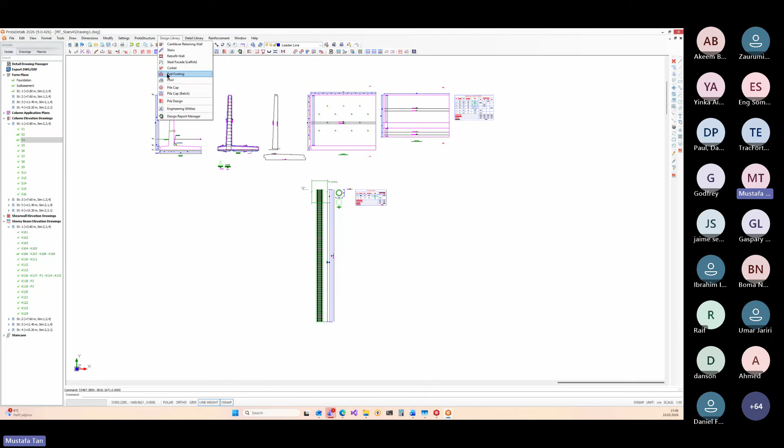And we have other design capabilities like corbels, pile cap, pad footing, and pool macro. You can perform an independent pile cap design here, and if you have a steel facade scaffold, you can design the scaffolds as well.

This is a very specialized tool in ProtaDetails. All you have to do is start the analysis, and it will analyze it with finite elements. You can export the results to SAP2000, or just create the details.

ProtaDetails is powerful - it includes a powerful engineering library inside it, and you can create detailed drawings and drafting independently in ProtaDetails. That's very handy.

Okay, let's close it. And let me finish by briefly talking about ProtaSteel. So let me show you another simple model that I made.

After you finish your steel design in ProtaStructure, you can just open ProtaSteel for designing the connections and creating the detailed drawings.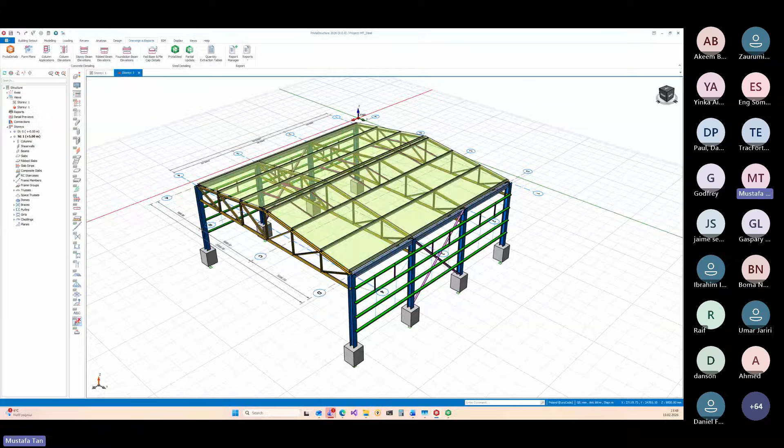When we send the model to ProtaSteel, not only the geometry but also the internal forces come across. Let's double click - you see the internal forces are also in the members.

ProtaSteel is a powerful software, very similar to Tekla, because it has all the conventions that Tekla has. It's tailored for steel drafters and engineers.

But on top of Tekla, ProtaSteel is also able to do connection design. As you see, we have the internal forces here, and using these internal forces for each combination - let's see the table view - we have the results for each combination.

So using these combination results, you can do the connection design inside ProtaSteel. And we have a new functionality: if you have a connection, you can send it to IDEA Statica and do a finite element component design there. But you don't need IDEA Statica - inside ProtaSteel, you can do the connection design, as I said.

And this is pretty much a 3D software, very similar to Tekla. You have all the commands like work plane, coordinate systems, etc. You can play with the members, adjust the member positions, and do all sorts of modifications in your structural model.

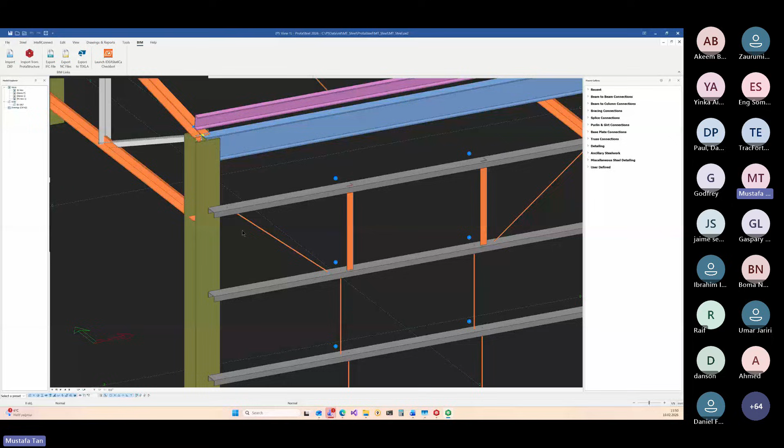But when you send the model from ProtaStructure, the entire model is pretty much ready for production. For example, you see the girts, trusses, and purlins are all in exact positions.

So let's say, for example, here if I have a beam to column connection, say a stiffened end plate, you can insert it quickly. Maybe if you have a bracing connection here, you can insert a gusset plate, or insert a purlin connection here, or a girt connection here.

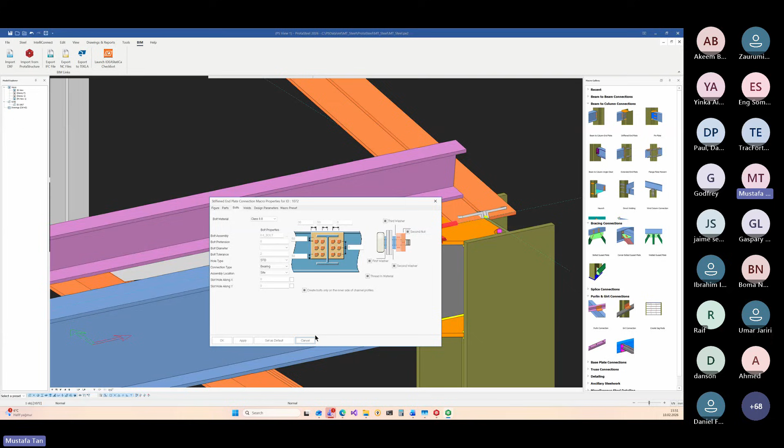This is pretty straightforward. Selecting from this macro - this is of course a macro - you can select one component and hit the macro properties. You can see the macro properties here, customize the macro, fine tune the parameters, and adjust it to your standards.

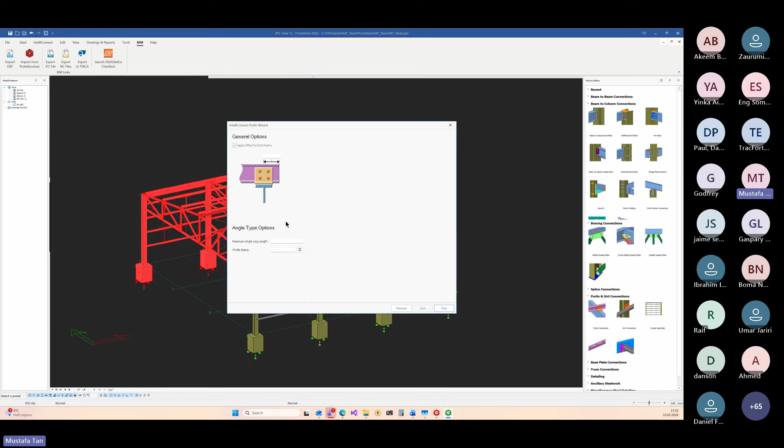And also we have a very powerful functionality called IntelliConnect. You can create purlin connections, maybe with the angle type, next, and run - it will automatically create all the purlin connections at once. IntelliConnect is quite smart - it will assess the joint condition and decide on the proper connection, and it will also recognize existing connections as well.

So maybe here, let's put different end plates. There's a purlin connection here.

Okay, maybe we can use IntelliConnect again to do the truss connections for me - that's a 10 millimeter gusset plate.

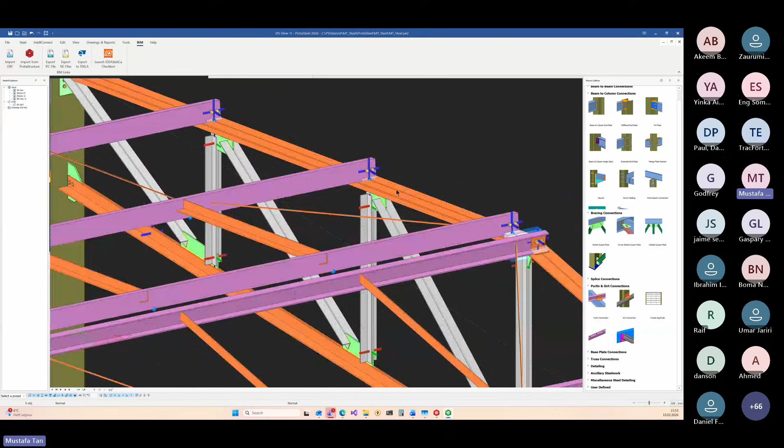Okay, so you see all the trusses are connected with the gusset plate connection. Let's select the assembly and show only selected. You will see the assembly that will be created on the site.

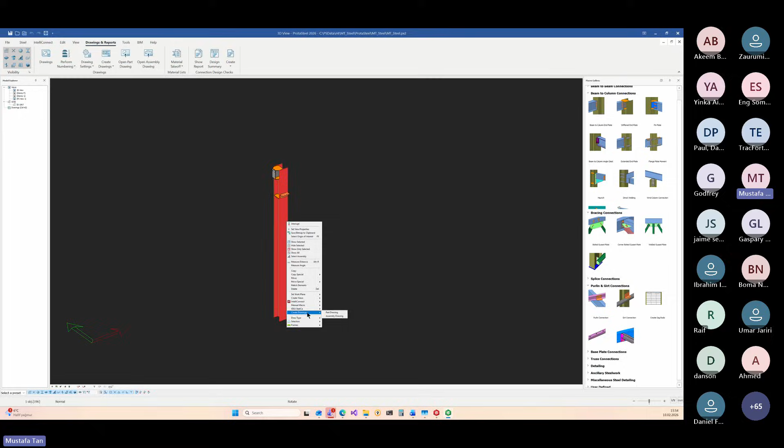Before going to drawing, you have to perform numbering. Numbering completed, because in order to create the assembly drawings, you have to have some sort of numbering. And for this one, let's create an assembly drawing.

Let's see, this is the assembly drawing for the column that we created. Let's close it. See the drawings again, what we have for the views. So let me maybe create a 3D view.

Drawing, general arrangement 1. And from the views, because in ProtaSteel, everything is a view. Every view is a different representation of the 3D model, and you can insert these views, and you can annotate this one again.

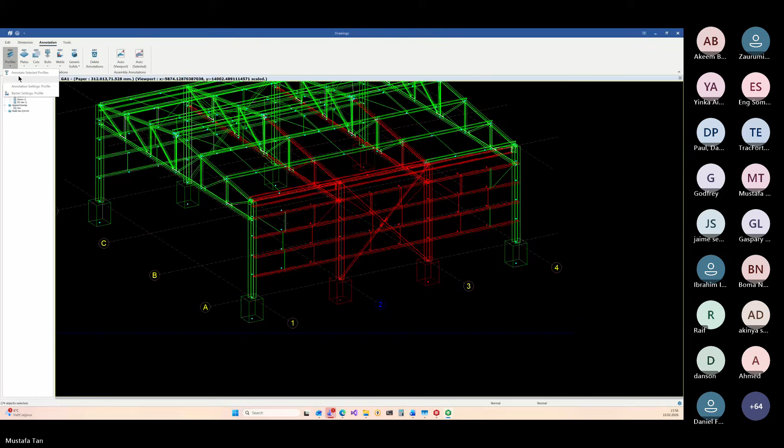Maybe I will have the profile name placed below here, and I will annotate them. You can annotate any profile, any view, inside the general arrangement drawing.

In ProtaSteel, general arrangement drawings are semi-automated. You have to create your general arrangement drawings yourself, but you have all the tools to create the drawing yourself. So I won't be talking about ProtaSteel too much because there are a lot of details here.

You can do user-defined connections. You can use commands like bolts, plates, welds. You can create your custom connection and communicate it to IDEA Statica, or use it in other projects as well.

It's a very detailed software. You can do all the steel drafting here, but in this limited time, unfortunately, I will not be touching all the functionalities. This is a very, very brief overview that I can tell you at the moment.

This is all I have to talk about today. I hope you enjoyed it. I tried not to be monotonic. I tried to show you different scenarios, different models, and give you different information on different capabilities. I hope I managed it. I hope you liked what you saw today.

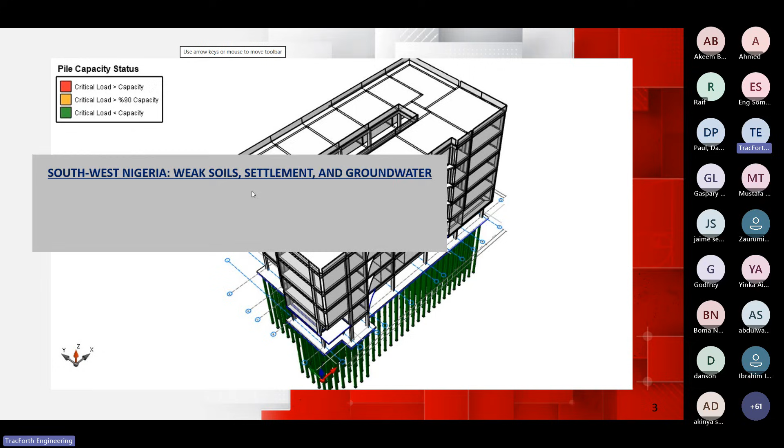But whether you have issues with soil, which has to do with a lot of geographical issues — like if you go to Southwest, you encounter different kinds of soil strata, conditions of reclaimed or marginal land, differential settlements. In those cases, piles and rafts are no longer optional, they become basic. When you go to South-South, there's aggressive groundwater, hydrostatic uplift, and basement walls act as retaining structures, even for water.

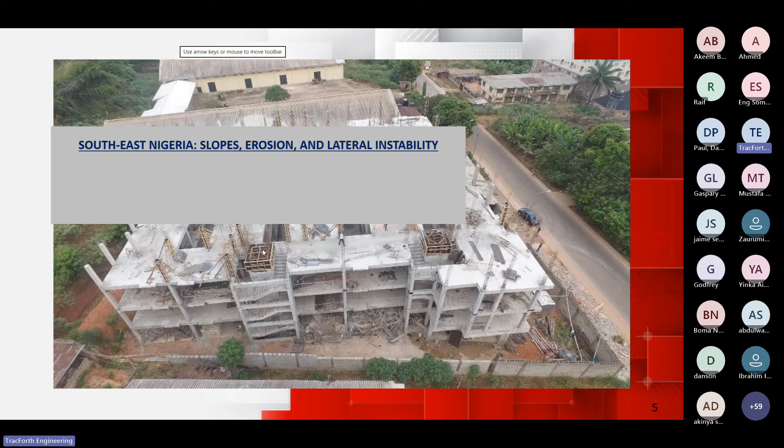So when you go to Southeast — and Southeast, I can tell you, this project here, this was the stage I stopped at before I left Enugu State in 2023. I can tell you, this project was designed and supervised by me, and I have a whole lot to say about the type of soil and how well ProtaStructure helps me.

So most of you are faced with gully erosion, slope instability, retaining walls, and deep foundations, which become the order of the day. When you go to North Central, like Abuja, you don't have much issue with the soil. But the issue here is efficiency, how you should not over-design, where you don't need to use pile, you don't have to use pile. This is one of the many features that ProtaStructure will help you with.

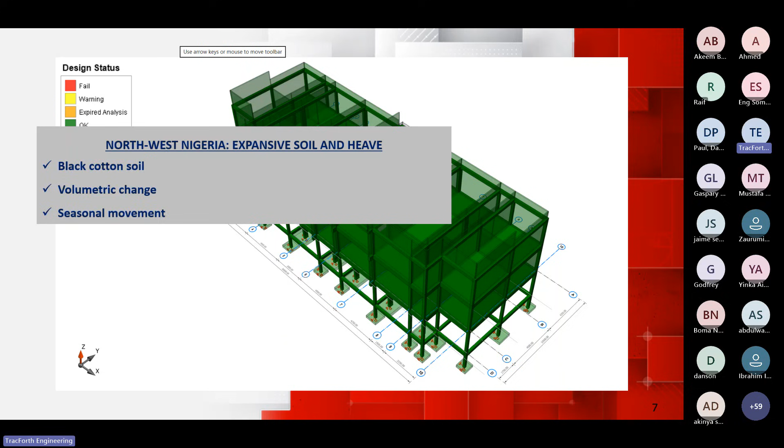So when you go to Northwest, you have your own peculiar challenges. Like I said, I don't want to go much into it. Now, wherever you are, be it Abuja, Lagos, Port Harcourt, Nairobi, Accra, or any other part of the African nations, the challenges are almost consistent. You are faced with complex foundation, basement and retaining issues, structural interactions, and frequent revisions to architectural drawings.

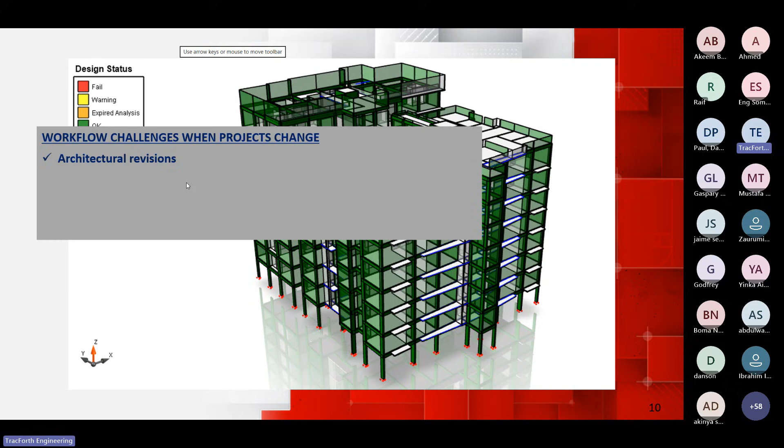I know that Mustafa has touched so many of these features, and the workflows are just there. When the architectural drawings are revised, are you going to start all over? No. With ProtaStructure, you don't have to do that. Will you remodel the foundation, basement, repeat the analysis and detailing, losing lots of time and consistency? This should be able to help you make informed decisions.

What does an engineer need, regardless of where you are? What must a tool do? And whatever tool you are settling with, if it doesn't do that as an engineer, then you can't make it a choice. I'm happy you've gone through with Mustafa most of those features, which within the constraint of time he couldn't go through all of them. So now, what an engineer always needs is one consistent structural model.

You don't have to have a segmented model, use Excel to do your load analysis, pick another software to do another thing. In the course of time, errors begin to happen, and that's why most times on site you see poor coordination between the architect and the structural engineer. Wherever you are, elements have to work together.